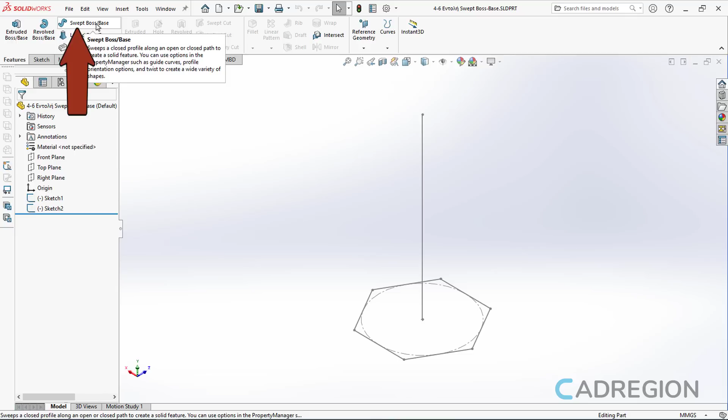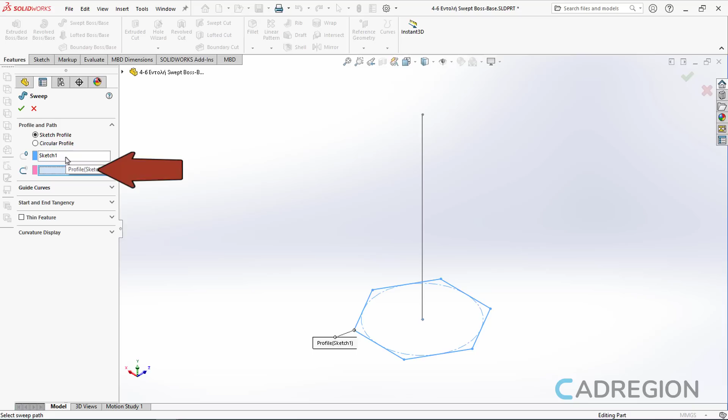Once I activate the tool, the Property Manager palette activates automatically. With the profile field active, I will click on the hexagon. Once I do, the corresponding sketch is added in the profile field and the path field activates automatically. Now with the path field active, I will click on the line and once I do, a preview appears.

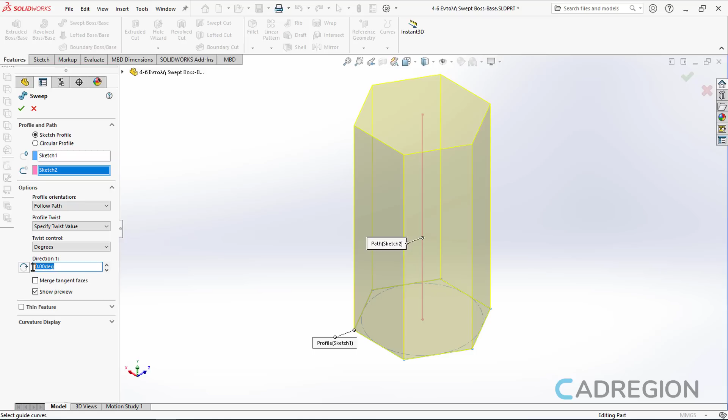If I want to extrude the profile and at the same time twist it, all I have to do is go to the Options area, expand the Profile Twist list and select the Specify Twist Value option. With the Degrees option selected in the Twist Control list, I will go to the Direction 1 field, type 45, and press Enter. Once I do, the preview changes accordingly. I will click on the check mark to create the final solid.

Notice the final result. At this point, I will open another document to show you how you can also add guides to control the extrusion better.

In this document, I created a sketch on the top plane and drew an ellipse. Then I created two more sketches on the front plane. In the first sketch, I drew a line perpendicular to the center of the ellipse, and on the second sketch, I created a spline which starts from the quadrant of the ellipse.

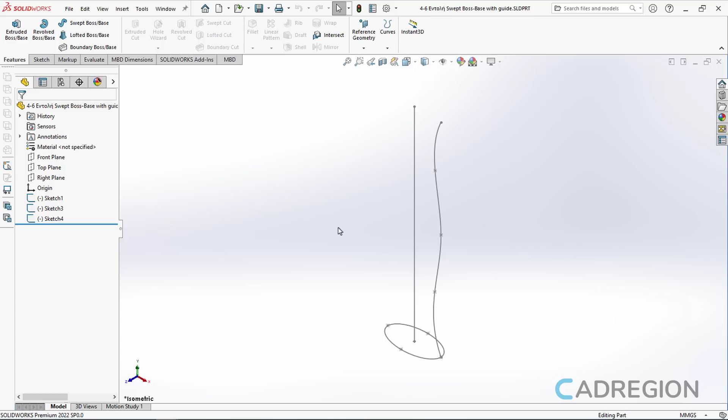The 2D profile that will be extruded is the ellipse. The path will be the line, and the spline will be the guide of the extrusion. Now let's move on to see what that means practically. I will activate the Swept Boss Base tool from the Features ribbon.

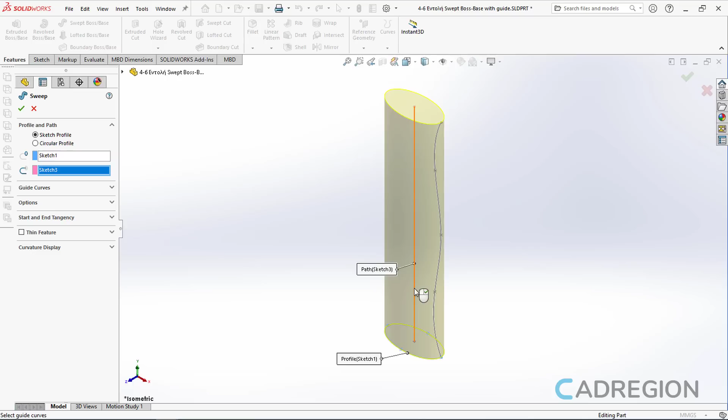With the profile field active, I will select the ellipse. With the path field active, I will select the line. Once I selected the path, a preview appeared. Now I will activate the Guide Curves field and select the spline. Notice how differently the profile is extruded.

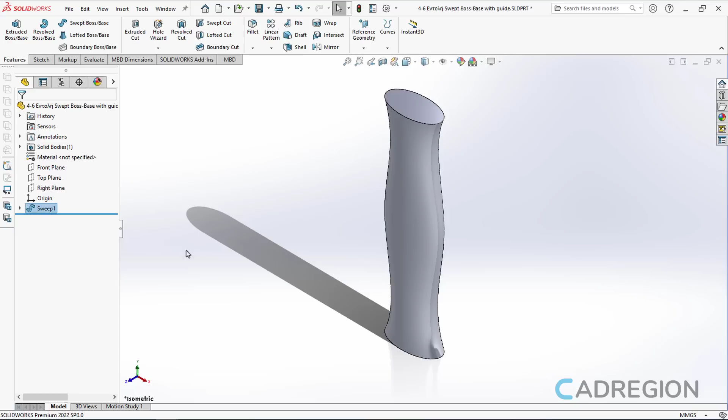I will click on the check mark to create the final object. Now I will go to the Feature Manager design tree and click on the Sweep feature. Then I will select the Edit Feature option. The Property Manager palette activates again and I can make changes to this extrusion.

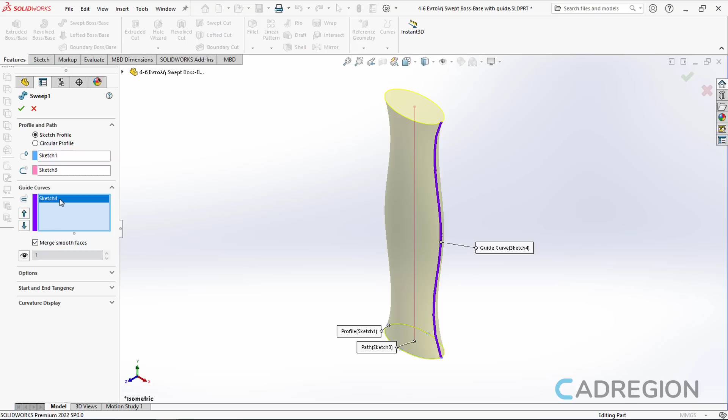For example, I will go to the Guide Curves field, select sketch 4, and delete it. Now I'll click on the check mark again and notice that the elliptical profile was extruded straight along the line.

Now, when we use guides, there is always a possibility that Solidworks will not be able to create the extruded feature. To understand better what I mean, let's move on to an example.

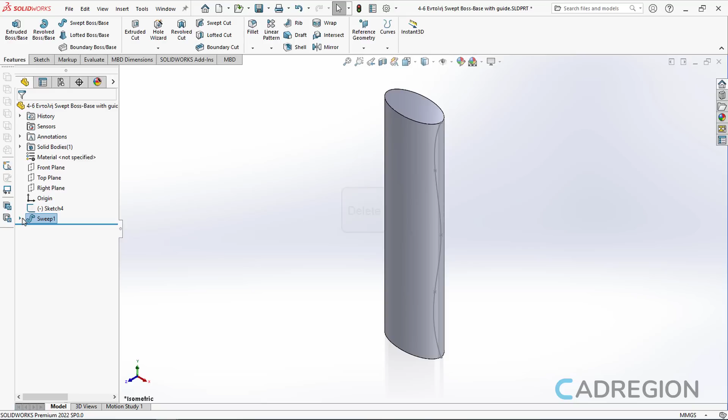I will go to the Feature Manager design tree, expand the Sweep 1 feature, and press Delete. In the message that appears, I will select Yes. Then I will click on the front plane and activate the Sketch tool.

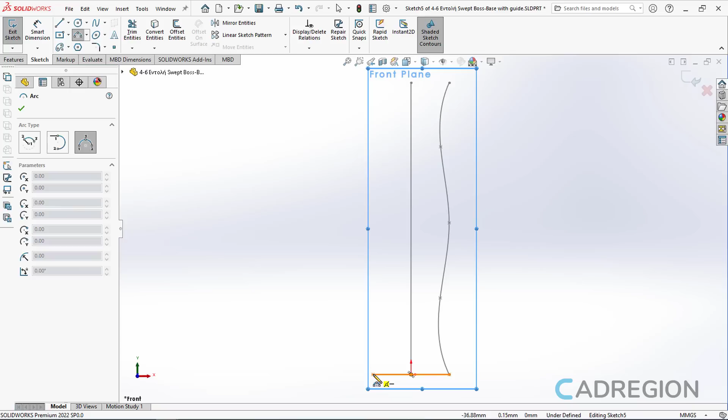I will create an arc on the other side of the ellipse and add this arc to the guides. So I will activate the 3-point arc tool from the Sketch ribbon and draw an arc which will start at the opposite quadrant of the ellipse and have the same height as the spline. Now I will deactivate the arc tool and exit the sketch.

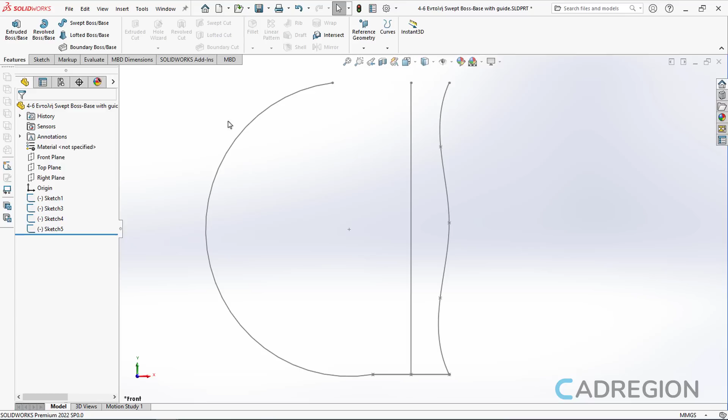Now I will activate the Swept Boss Base tool again and select the ellipse to specify the profile that will be extruded. Then I will select the line to specify the path of the extrusion. Last but not least, I will activate the Guide Curves field and select the arc. Notice that the preview appears.

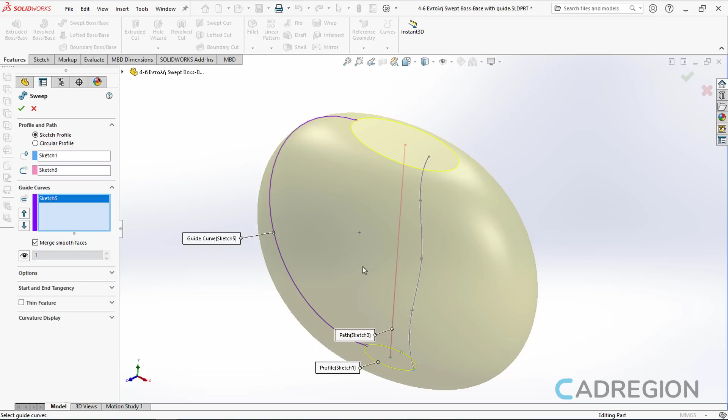This means that the profile can be extruded following the selected path and the guide curve. Now we'll click on the spline on the opposite corner to add it in the Guide Curves field too. However, notice that the preview disappears. Now if I click on the check mark on top of the Property Manager palette, an error message appears informing me that Solidworks cannot extrude the profile using both guides.

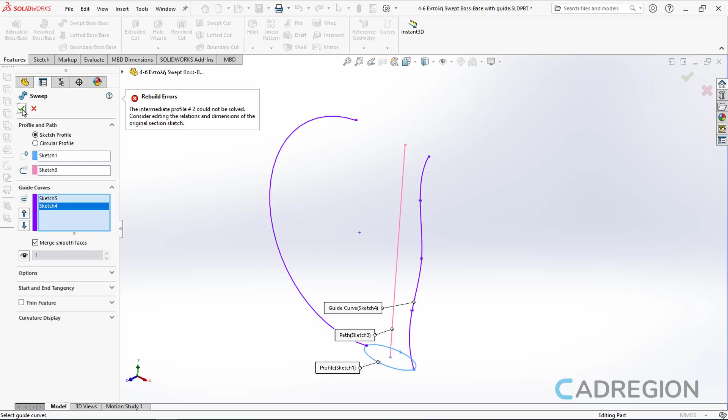So in this case, I have to create another profile or remove a guide. In this example, I will simply click Close to cancel the operation, and move on to show you another example. The Swept Boss Base tool is very convenient when we want to create pipes.

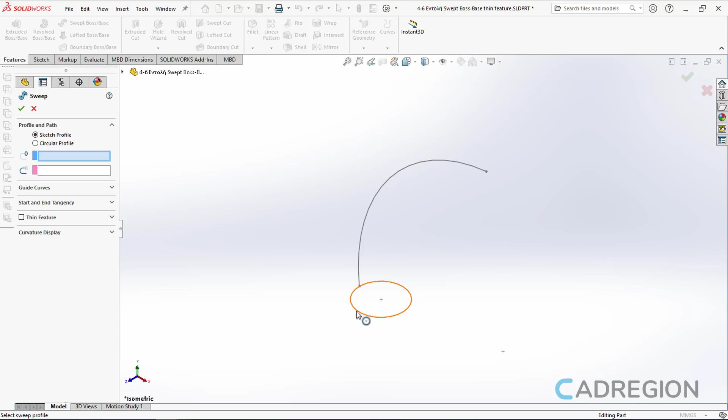So I will open another document where I have already created a circle on the top plane and an arc on the front plane. Now I will activate the Swept Boss Base tool. I will select the circle to define the profile that will be extruded, and then select the curve to specify the path.

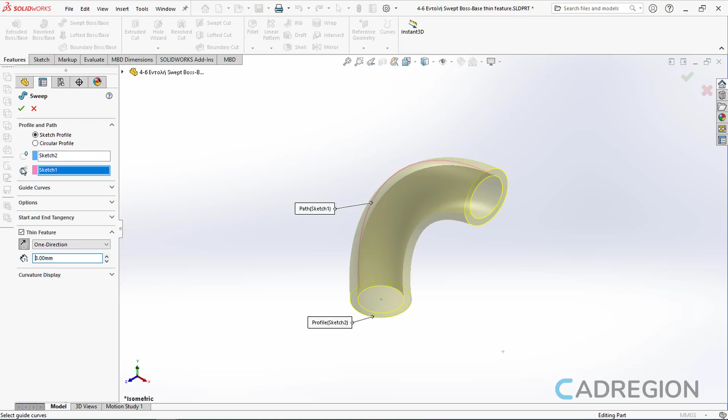Now I will activate the Thin Feature option and select the One Direction option from the list. Notice that now I have created a hollow object. I will click on the Reverse Direction button and specify its thickness to 3 mm. Now we'll click on the check mark and I will orbit the view to show you the result.

Notice how easily I created a pipe. At this point, I should mention that once you activate the Thin Feature while creating a solid, it cannot be undone while you edit the feature.

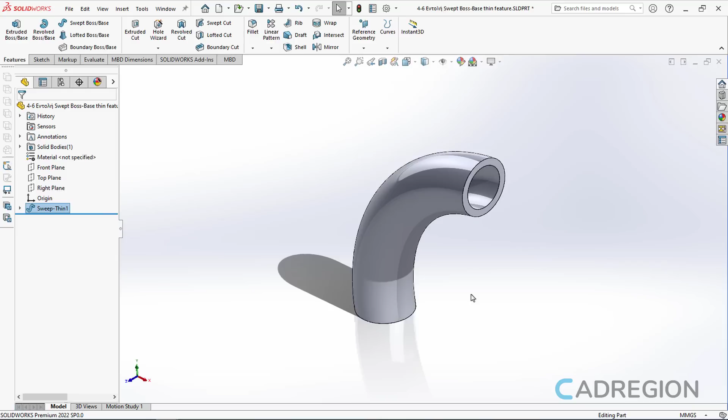So this was how the Swept Boss Base tool works. I suggest that you create your own solids to become more familiar with this tool.